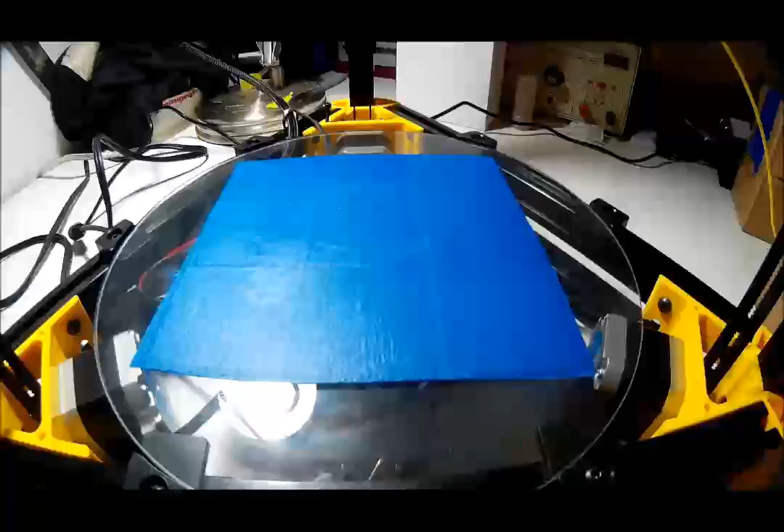Well, almost ready to start doing the end caps. These are the caps that cover this up here. I did it extra thick for wires, adjustments, anything I might need to do. Gotta do all three of them.

It says approximately 4 hours to do one. Oh, here we go. I know, that light's bright. Should do a 5-line brim. I kicked my overlap up to 25 from 15. I noticed my edges there's a little gap in them.

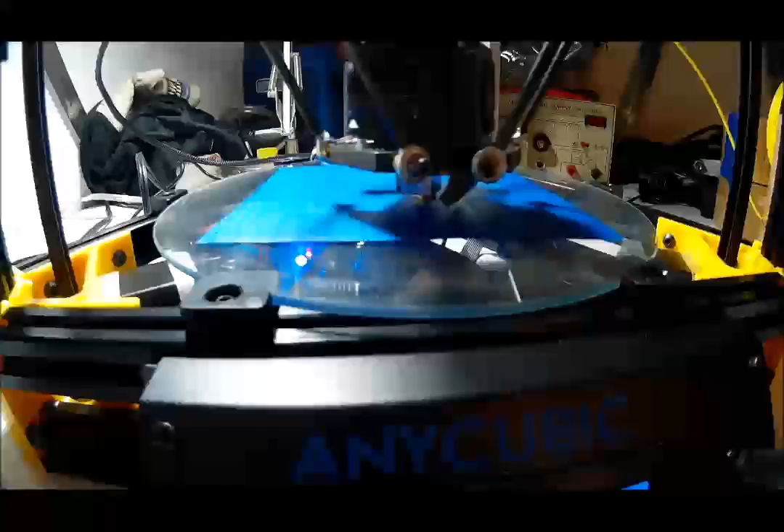So this should be the brim. There should be 5 lines. That should be plenty to start getting the filament heated up and going the way it should.

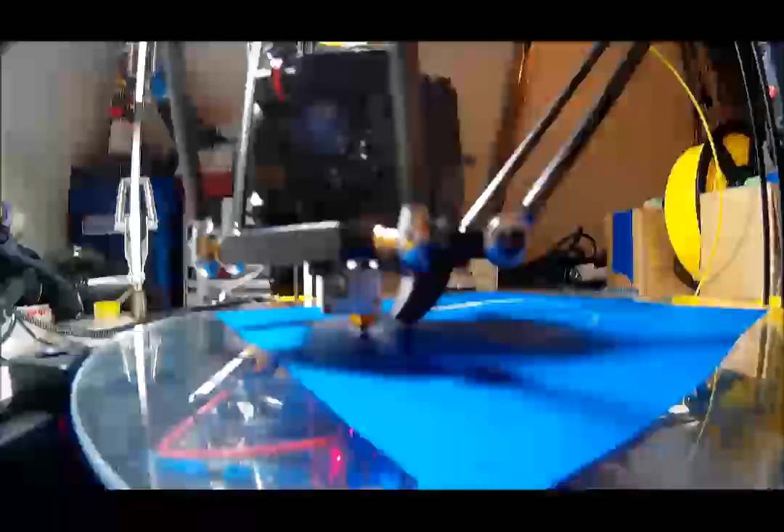So far, so good. We'll just watch that first layer go down, see if we get any lifting or if it does any better. I think I got everything tweaked now.

And then we'll come back for the last couple of percent. Now it looks like we're done with the brim, and we're starting to build itself. You can see that little gap in there, I think. Hopefully you can see it.

Now you'll notice over here where it's pushing into the tape and smeared. I raised this side of it up half a millimeter because I kept getting that lift on this side. And it may have been too much. We'll see how it goes. I may end up having to stop this.

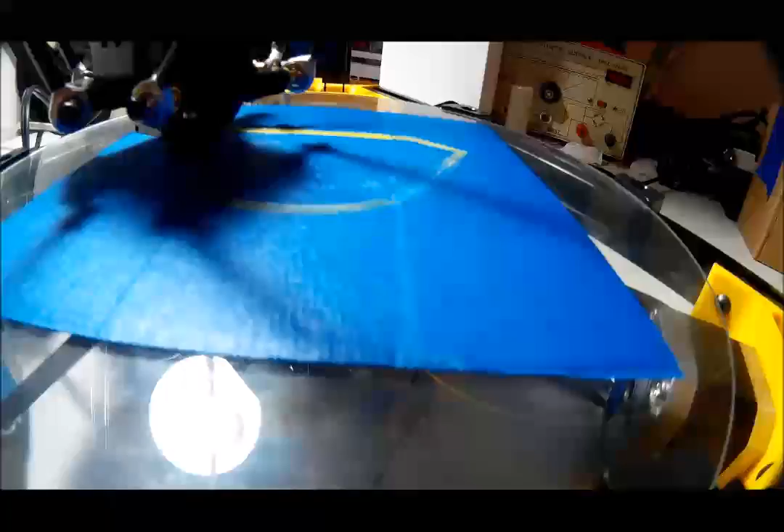That first layer might be an issue. I think I should have went 0.25 instead of 0.5.

Now this first layer I am not going to kick the speed up. It's definitely pushing into the tape. Ouch.

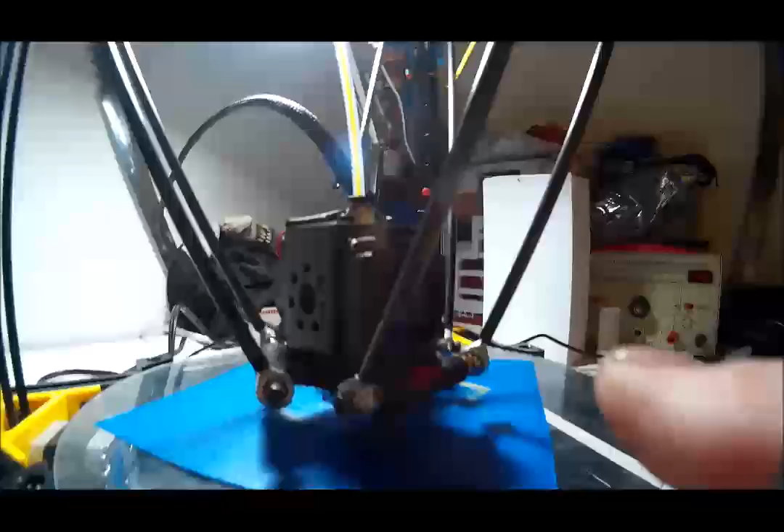And I told it not to cool the first 5 layers, so you can see my fan is not on. I told it to not cool those first 5 because I want it to stick. Been having some issues with this corner. Trying to avoid that.

I'm trying to find a good spot to put you.

Definitely having some issue there. I lifted it up too much. I guesstimated 1 layer of tape to be about 0.25, and I put 2 on there. So I should have put just the 1.

We'll let this get to at least the second layer and we'll see if it's doing anything. If not, I may have to reevaluate.

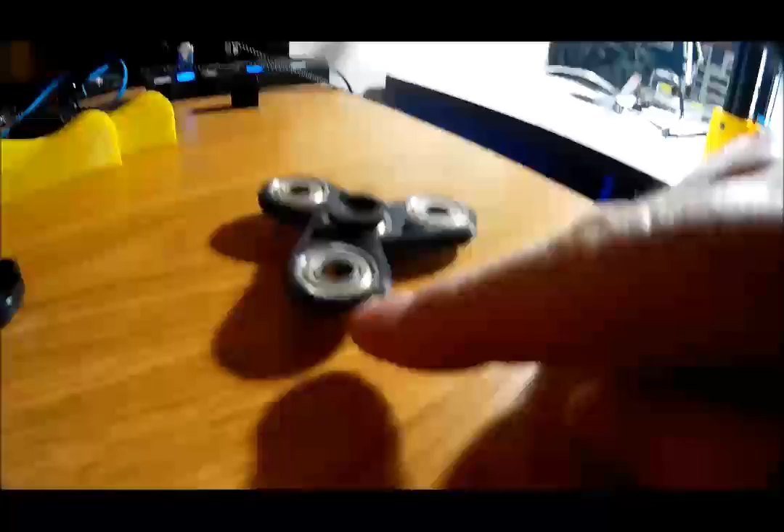This is the side that lifted on it. And then I made my, what do you want to call them, filament holder things. And this is the side where it was laying down and it lifted up. And then this one, and the same there. And the exact same there.

That's why I put that extra layer over here, because that's where it's been lifting. Hopefully we can get it to stick.

But clearly 0.5 millimeter was too much. I don't really have any way of telling it to skip to the next layer and move up a height.

Let's now finish that edge, I think. So it should start going pretty good.

Talking to a friend of mine, and he was saying that first layer should basically smush into the tape. Well, it's smushed.

When it gets up to that next layer, when it lifts up, well, I might wait for this third layer actually. When it gets up to the third layer, I might speed it up a bit.

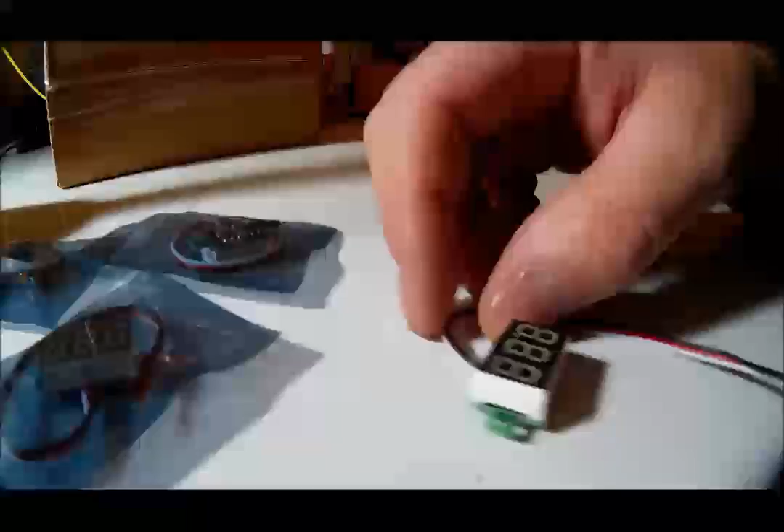I did get my LEDs in, by the way. I'll show you those real quick while we're waiting. They're actually a lot tinier than I thought they were going to be.

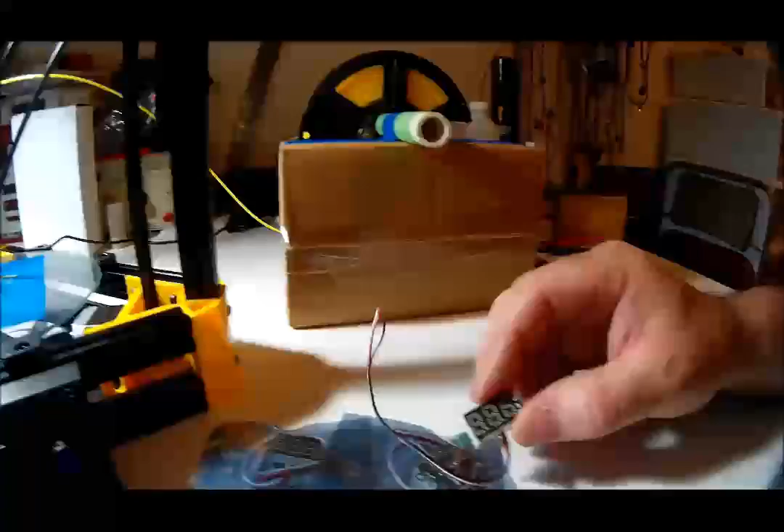But these go up to 32 volts. They're actually a lot better than I hoped. Now this one's open because I tested it. I only ran it up to 28 volts because I'm only going to be running 12 volts on this, maybe 14 on the bed heater. But I ran them up to 28, no issues of any kind. They're pretty tiny. I was thinking they were going to be a little bigger, but that's fine.

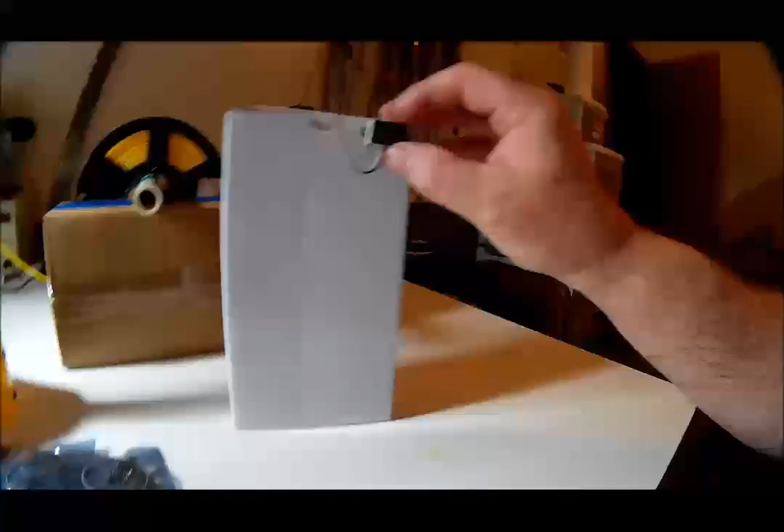Basically the power supply will be sitting on there. I'm only going to have 2. I don't see any reason to have 3. One for the voltage going to the board, one for the voltage going to the bed heater.

And I thought I ordered yellow to match my printer, but I got blue instead. Which is okay, because that actually matches my motherboard, and my display screen are all blue. That's fine.

Alright, now it's doing the second layer. It's doing the outline, the shell. You're looking the wrong way. There you go.

I did not double check the angles on these. The person who uploaded them said they were specifically for the AnyCubic Plus, and I'm going to take his word for it and print this first one. Not even going to question it.

Before I print the second and or the third one, I will definitely be checking this, making sure it's the right angle and the right fit. He did have pictures of it up on his printer, and they look pretty good.

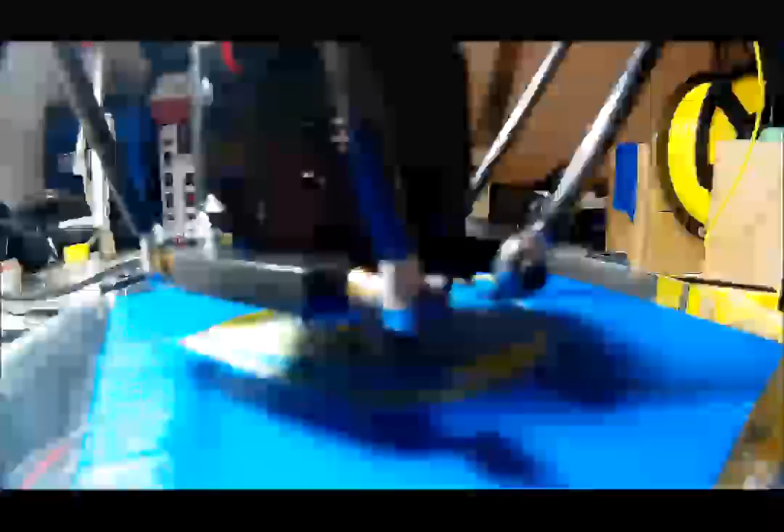I think here you can start seeing the lines going down. Of course, when I get over here, it wants to move over here. They look like they're laying down pretty good.

See, it's laying down pretty good.

After this layer, because it's going pretty slow, I mean it's fast compared to those little H printers, but I've only got it set to 30 for speed. I'm going to crank that up to about 100 on the next layer if this one doesn't have any issues and everything looks like it's sticking. So far, and this is the good side that I've never had a problem with, it's going down perfect.

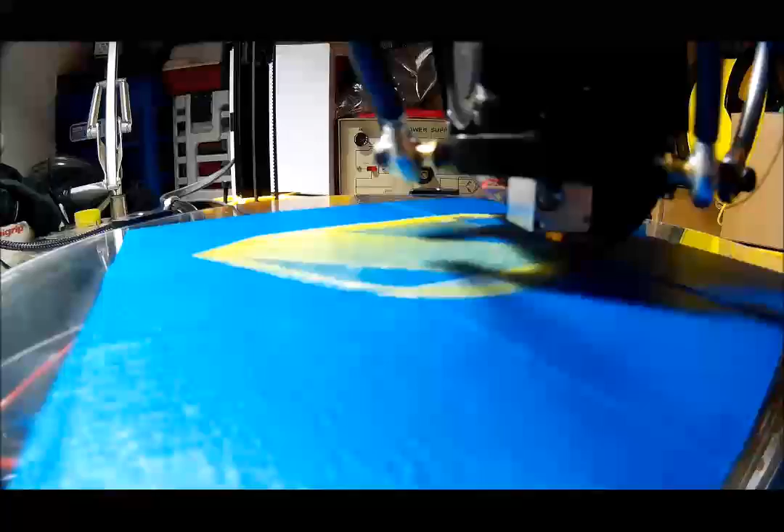I did change the infill, come to think of it. I went from 25, changed it down to 20. Still left it a little thick because these are going to be, hopefully, permanent parts that are going to be up top, and once they're on, I don't plan on ever taking them off unless something bad happens.

Alright, now it's starting to do this edge over here that I got a little higher than I anticipated. Looks like it's laying down pretty good. It's only got a little bit there so far though. Trying to see that corner. Just have to wait on it.

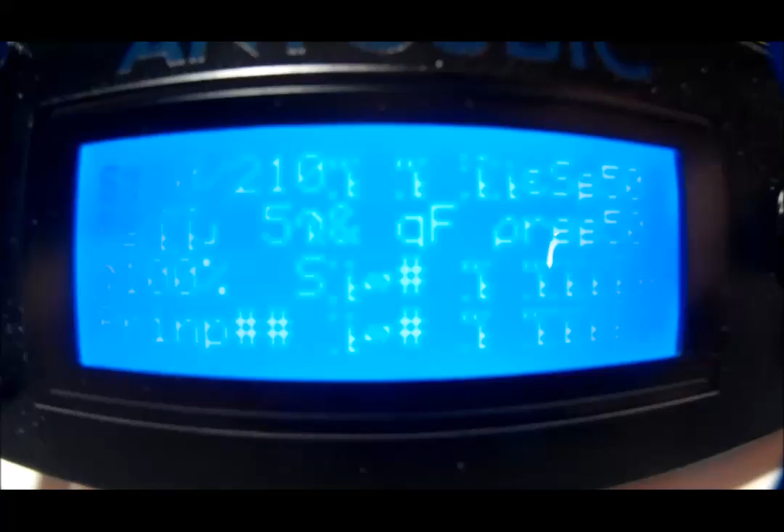Oh, there's another thing, my board went nuts. Now that used to freak me out, but then I realized that it actually completes the print, it knows what it's doing. I have no idea what this is all about. However, that does make it difficult for me to turn the speed up.

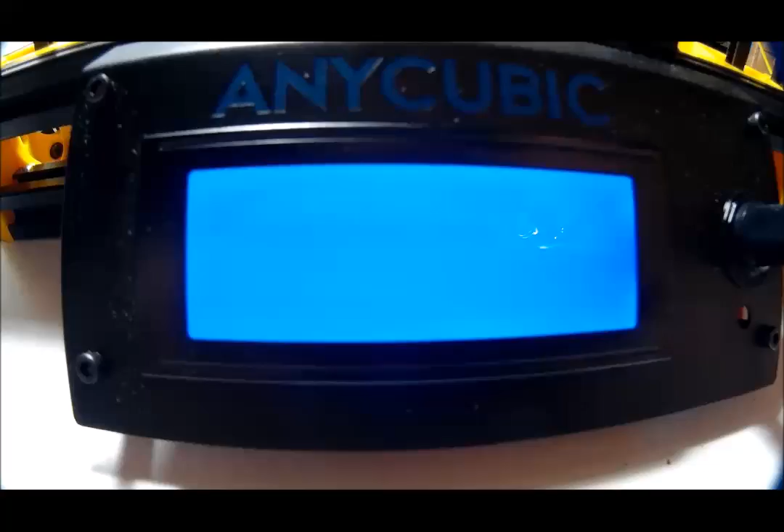Because if I can't see what I'm doing - now if I would have made note and knew what it was doing, I think it's the second click down, press - but I would just be guessing. Yeah, and then if I push it, it just goes out. Still wouldn't have made any difference. So yeah, some definite issues with the display screen.

A friend of mine's screen, he says his does the same thing. It freaks out and prints nothing or shows nothing on it, and then it starts printing garbly gook. So that means that me kicking the speed up is probably not going to happen. Well, that sucks donkey turds.

Still watching that print, and it is filling that corner in just as I hoped it would. I think just that first initial layer I had it, like I said, a little bit too thick. So from here on, now you can see it, it laid down a very nice layer, and everything seems to be sticking.

I did the overlap. I went from 15 to 25. And granted, we only have one layer down, so it's really hard to see, but I think it overlapped quite well.

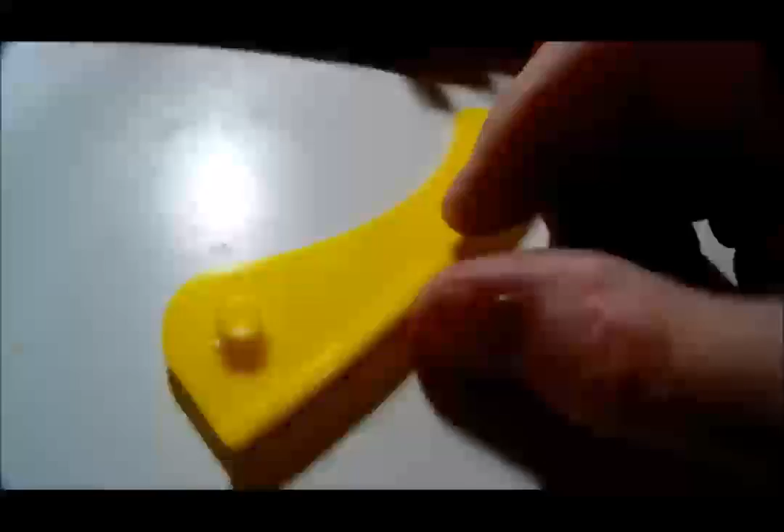I pull this apart. Hopefully you can see, like right out on that edge, you can see a line. That line is what I'm trying to get rid of. Oh, there you can see it, that little line, that's the overlap. That's why I went from 15 to 25, so hopefully there'll be no line.

Now this is where I would normally have kicked the speed up about 3 to 4 times what it is, going from 30 millimeters a second to 100 to 120. But my screen is not cooperating.

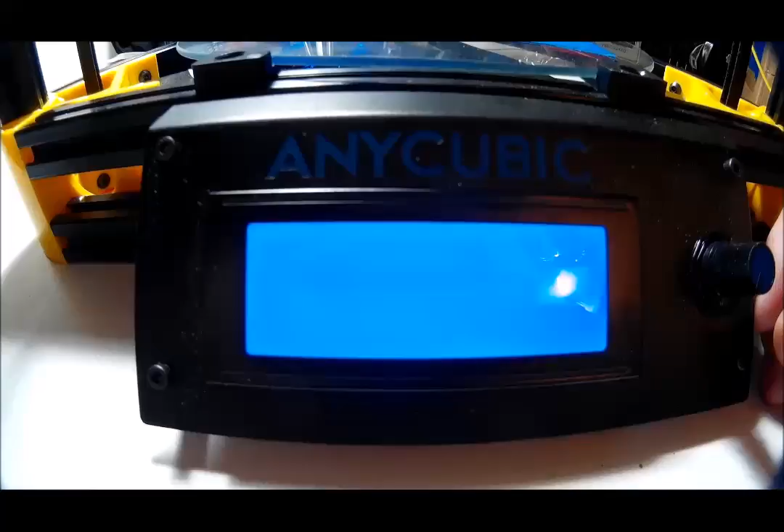Alright, well this is going to be a 4.5 hour build according to the Cura that I used. I'm not going to make you watch the whole thing, and I'm not even going to speed you through it. I'll come back every so often and give you an update. We'll do this whole build, I'll post it, going from what you've got so far all the way to the very end where I test fit, any sanding I may have to do, or any fitment. Make sure it fits, make sure the angles are proper.

But just eyeballing it, comparing it to my angles here, because they're the same angles, it looks, from what I can see, it looks perfect. And I'm happy with anything that's even close at this point.

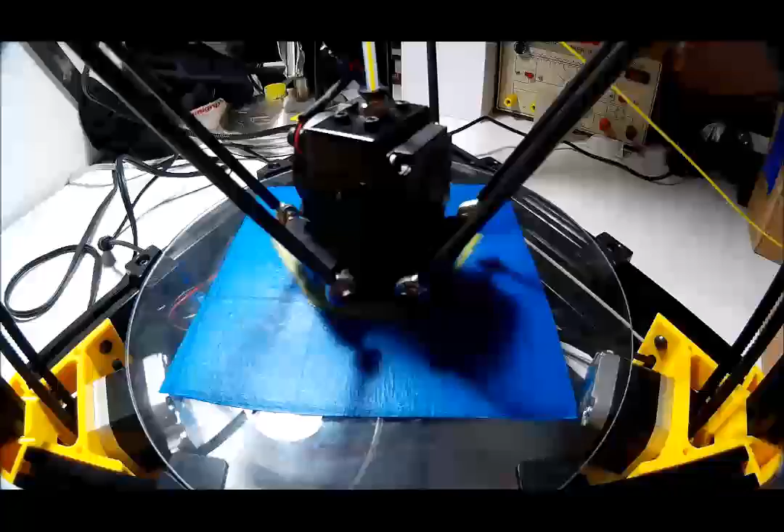Like I said, this is honestly only about my 3rd day of printing. You can see my little prints that I did here so far. So far, this is the biggest piece I have made, and this will be the next biggest. I'm only on the 3rd layer that it's doing now, and it looks like absolutely everything is sticking.

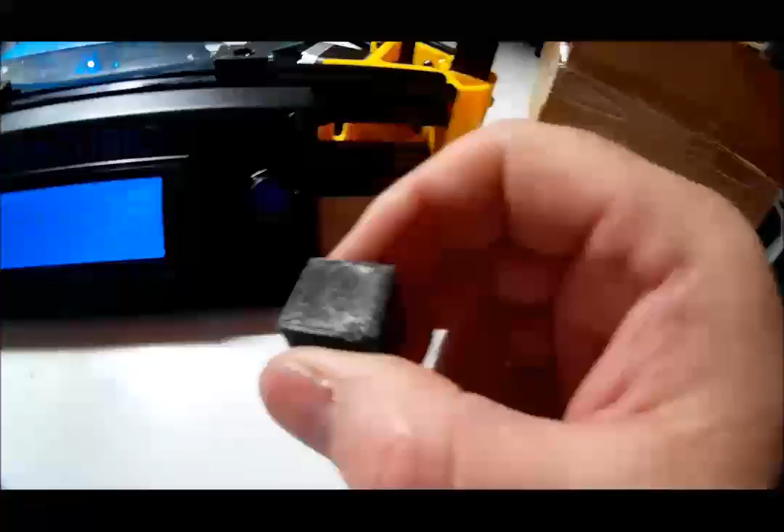My little cube I did, I think you can see on this one - there's still some glue on it, and I think you can see that line there where I did not overlap enough. That's only 15%, still got some glue on it. Haven't done any cleanup. On the top you can see that shell and the infill.

Like I said, I kicked that up another 10, so hopefully we'll see a big difference here in quality. And I think honestly on my next ones I'm going to kick the infill down even less. I dropped it down to 20, I think I'm going to drop it down to 15 - the density of it - do more of a honeycomb.

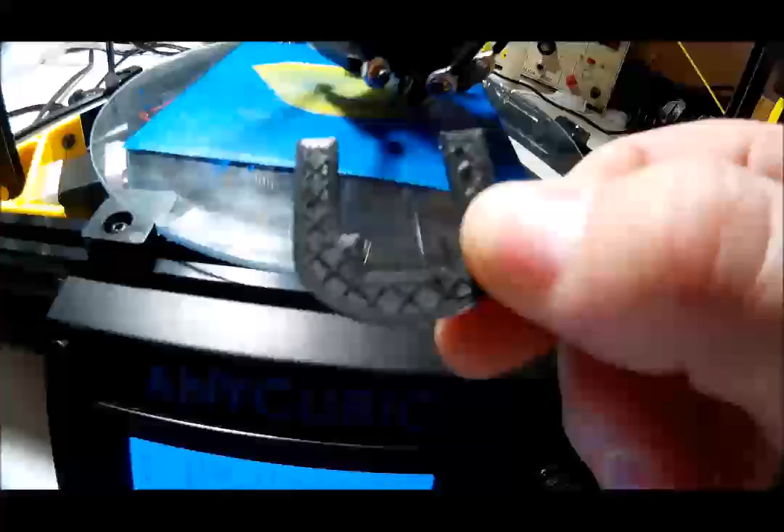Oh, I don't think I kept it. Well, you might be able to tell on this one. Yeah, you can see the honeycomb filling I was doing on this. I think on these I'm going to switch to that. This is a 15% fill, that's a 20% fill.

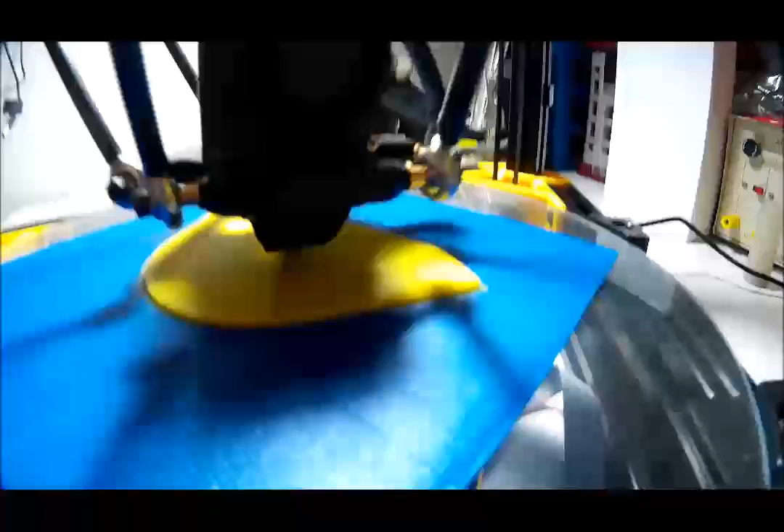Now here we are, we're about 30 minutes into it. My screen is still gobbledygook, so I have no idea the percentage or what layer or anything we're on. But as you can clearly see, it is printing perfect. My fan, as you can see, is spinning. It did kick on right when the 6th layer started.

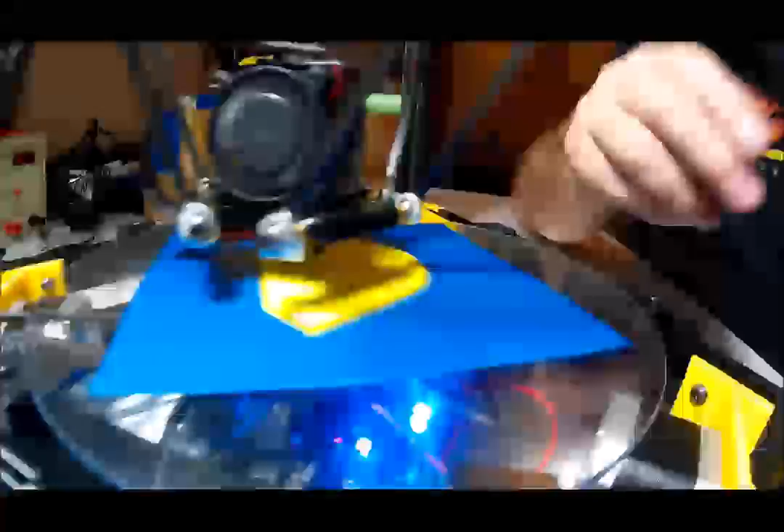Let's see if I can get you around over there. There's no lifting on this corner that I was worried about - that's the corner that always lifts on me. Everything looks nice. Go ahead and take you all the way around. Yeah, my hands are in the way.

So yeah, and the infill, way too much. I need to drop that down even more. That is going to be a solid brick. But yeah, we're going to drop that infill - we might even go down to like 10. Half of what it is would be more than enough.

I just want to let you see where we're at. Nice crisp edges, nice layering, line by line infill. You know, for the most part, I'm still going over the whole printer itself. I know that light's bright.

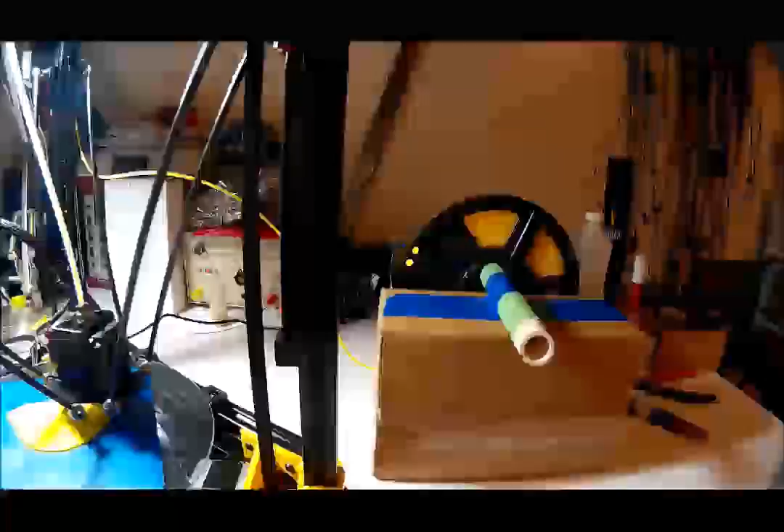My makeshift holder, since my filament reel is busted - can't use my filament reels. Darn it, thanks FedEx. Anyway, but yeah, overall, as you can see, I'm ecstatic with this printer.

Now you can see in here, I got this blue tape I put on there, it's in the shape of a square. That is because the particular build that I'm building pretty much fits it. I didn't see any reason to tape all the glass and go over everything, because this print doesn't take that much room, so no reason to waste tape.

But yeah, it's coming out pretty much everything I can see is - I don't see any issues anywhere whatsoever. Now again, I went off the person's build print that he had on Thingiverse, so I'm not 100% positive it's going to fit. I don't know why it wouldn't, but we will be finding out.

Actually, I just realized it started doing the layering for the inside where the cap's going to go, where the pulley sits up here. I just now started doing that. I think you might be able to see it better from here. Well, of course, it comes over to this edge. Really, dude? Okay, there it goes. And you can see the outline there, it's just starting to do it.

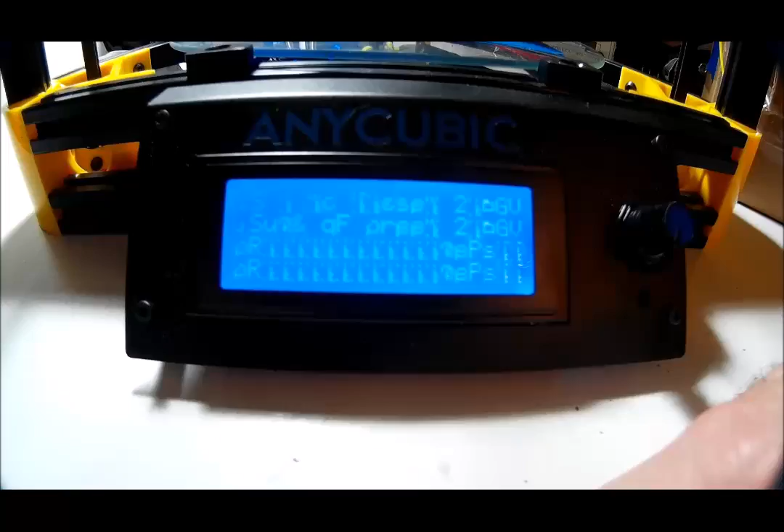I would tell you what layer I'm on or what percentage I'm on, but my screen is just not cooperating at all. I just got nothing out of it.

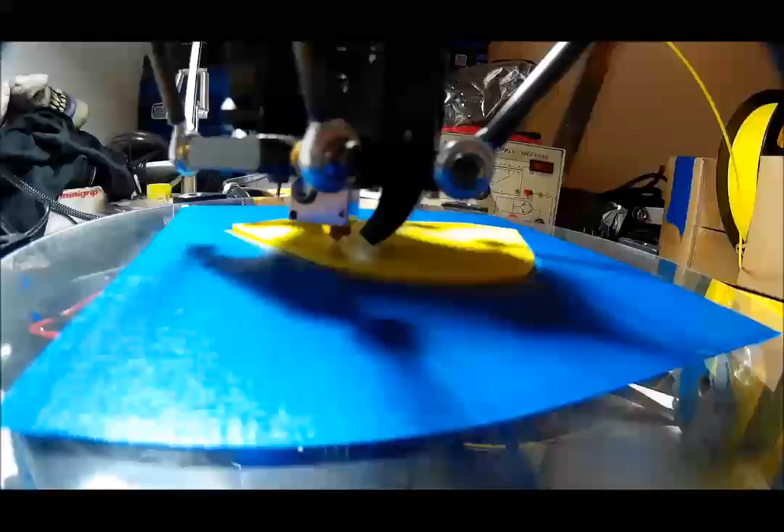And it's doing a little infill there, right there, back and forth, as you can hear and see. And for as thick as that infill is, I mean, they're like perfect layers. No overlapping, no melting, no gaps, no blobs of nothing. It's like absolutely perfect.

And for the build that I'm in, for as new as I am, for as new as this printer is, I mean, it's not even broke in yet. I am completely happy with it.

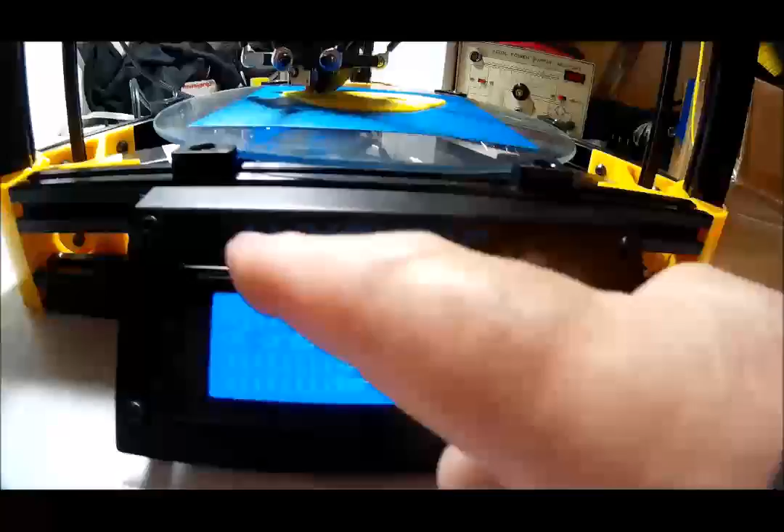You know, the screen has a bit to be desired, I think I've mentioned that now. You can see it's an AnyCubic. It's the Plus version, so it's 300mm by 240.

I think actually after I adjusted it, and I did put my linear rails as high as I could with the limit switch and not hit, I think I ended up actually at, I want to say it was 293.5-ish. So I'm about 7mm from 300.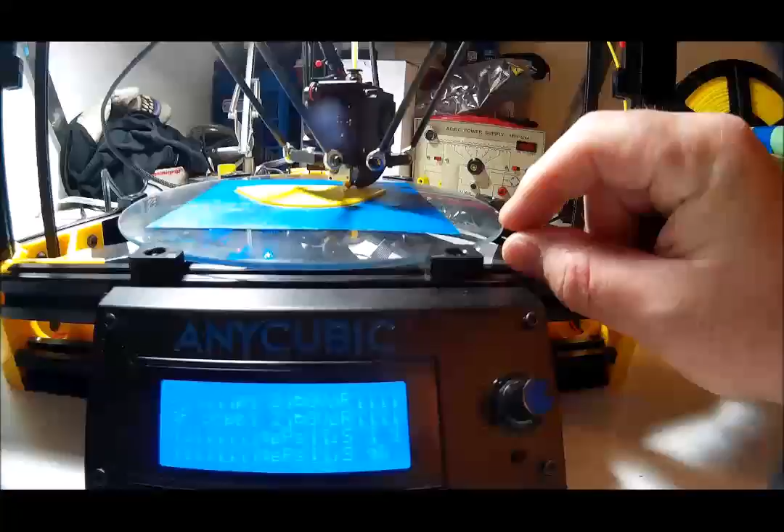Now that's with these current mounts for the plate, for the bottom base. I have not got the heat bed on there, but I am going to be switching these out. There's another type I'm going to use that's going to sit down a little. The hot bed will go down a little lower, and then this will actually be almost on the rails. It'll be real close, and then it'll have the springs on each end, 2 on all 3 corners.

And I don't know if I'll gain any space or if I'll actually lose some space. I would assume I'm going to lose a little bit, but from what I've seen in the pictures and stuff, it sits a little lower, so I might gain maybe a millimeter, maybe 2. I wouldn't say much more than that. I might even lose a millimeter or 2 with the springs on it.

We'll find out. So on the left hand side there, you can see it already did the left outline fill in. It's doing the right side. It's actually almost done with that. The middle part, I believe, is done. We'll wait for it to finish that edge over there. We got about 7 more lines, I think.

I'm still just fascinated with the math with this, that it knows precisely where it is. Back and forth, moves over just enough for the width of the filament. It just knows where it's at. Whoever wrote the math on these, yeah, they deserve their pay.

Now it's doing the outside edge. Now you can see that over there on the right hand side. And again, just no gaps, no blobs, no blurs, no smears. As far as I can tell, it looks perfect. And this is all stock, all the parts right out of the box.

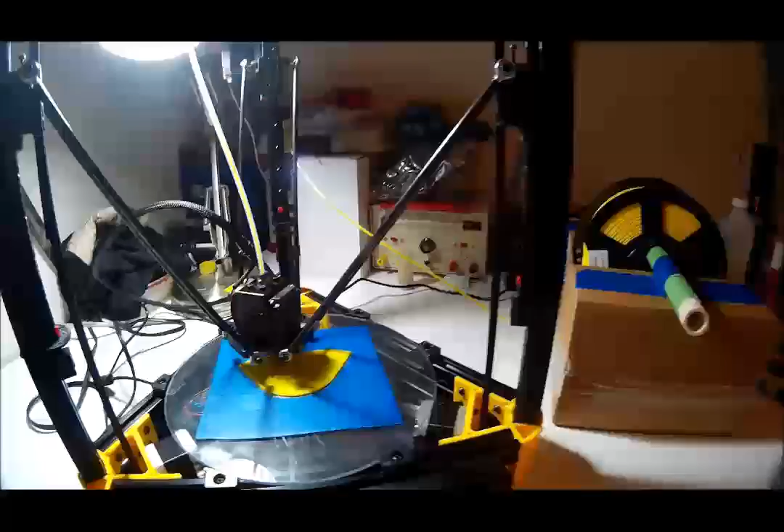I made some little adjustments, you know, I used this instead of that plastic wrap crap stuff they had. I put heat shrink on the wires and tubes up here. I haven't sealed it or shrunk it down, I left it loose, it's just to protect the wires. Not that anything gets up there, but I'd rather be safe than sorry. If you want to call it wasting the heat shrink, I'd rather do that than have to splice wires and solder them back together.

Fans are running cool. I would tell you the temp, but I can't. You know, this would have to be the one biggest negative.

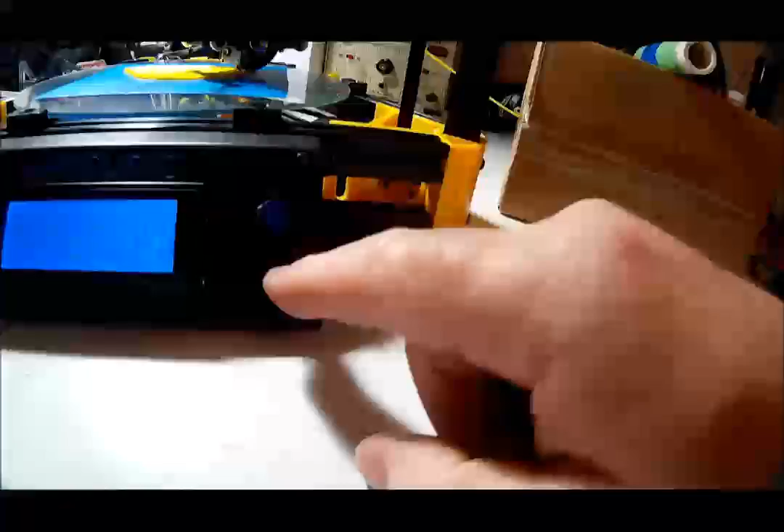The other one is this button here. I've seen some others from like GearBest, they have a little button that goes in there. This is the emergency stop. Now, yeah, you could probably stick something in there. Yeah, I could probably stick that in there and I could stop it if I had to. But I think it should have a button.

Oh yeah, glass is solid, bed's good, motors I've had 0 issues. Well, that one's ice cold, but this one actually felt warm. Yeah, that motor is warm. This one's ice cold. And all 3 are moving the same. I wonder why this one's so warm.

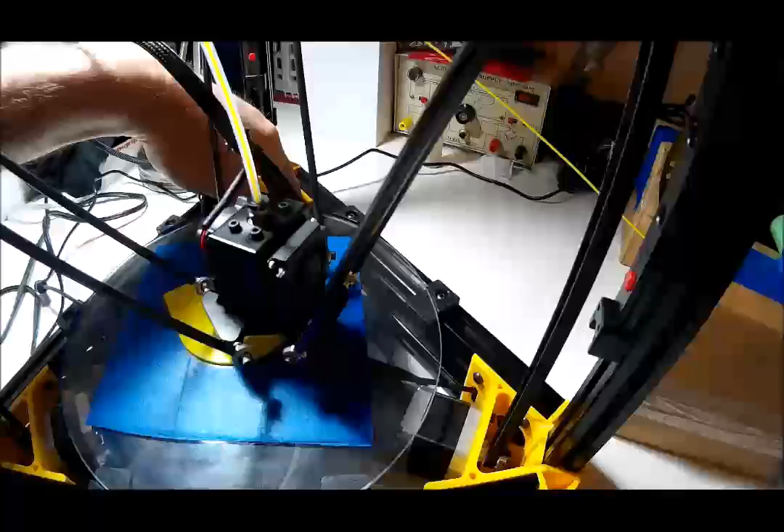Yeah, the Y motor's cold. The Z motor isn't cold, but it isn't really warm. My X motor, that's actually kind of warm. Interesting.

Well, yep, just letting you see where we're at so far. When we get closer to the top, or if I miss it because I don't know where the top is, I will come back definitely before we peel it off, show you what it looks like. We'll peel it, we'll have to pull that little brim off, or skirt. I'd call it a brim. But it is doing

Doing a damn good job. Actually, I do see one little thing, like right here in the corner.

It didn't fill in like it did over here. Oh, as I say that, it just filled in. Interesting. Yeah, okay, well it filled in now. That must have been just the end — they did that and came back over. Yeah, it's filled in now. Alright, well, never mind that.

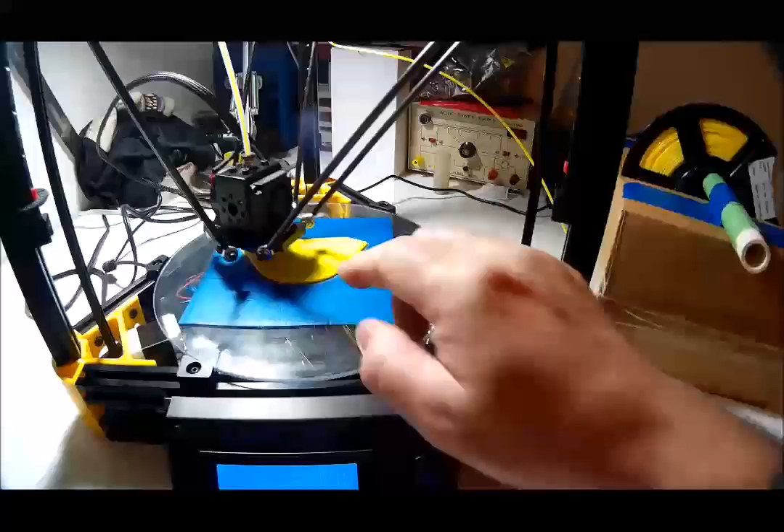I'm just going to shut up and let it do its job, and I'll be back when we get further on. I know it's going to get thicker on the edges here and make some walls, and then make the little lines that fit down in here, the little grooves that it snaps in with. When it starts doing those, we'll be back.

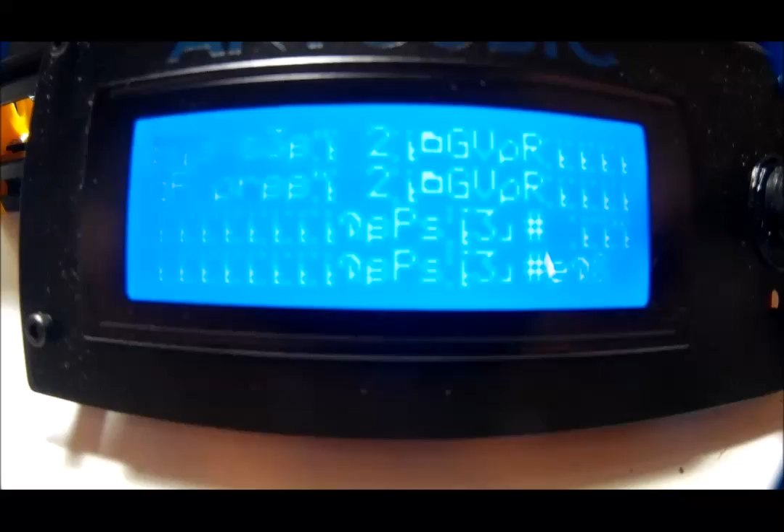Yep, 2 hours later my screen's still screwed up. And holy cow, when he said extra clearance, extra thick, I didn't realize he meant like a half inch. That is a whole lot more than I need, to be honest. As you can see, my clearance is just basically that little screw, and maybe for the belt and the wire for LEDs. I think I would have been better off with this version.

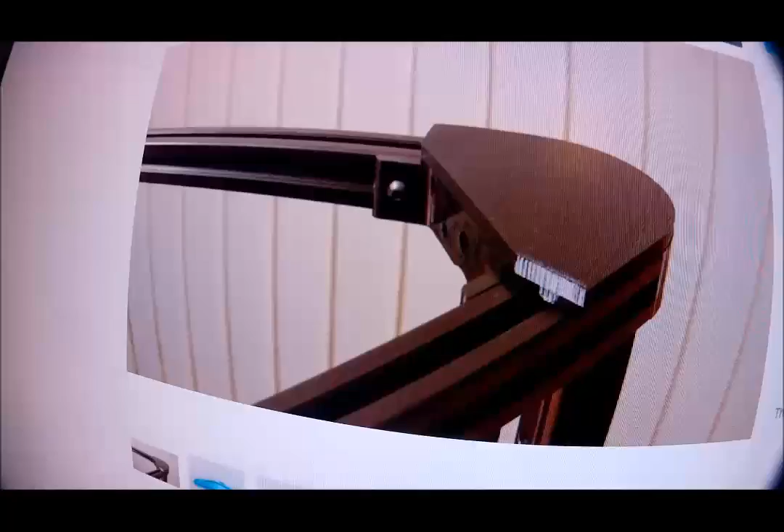I probably would have had all 3 done by now. So yeah, you can go ahead and download that one, because I think we're going to switch.

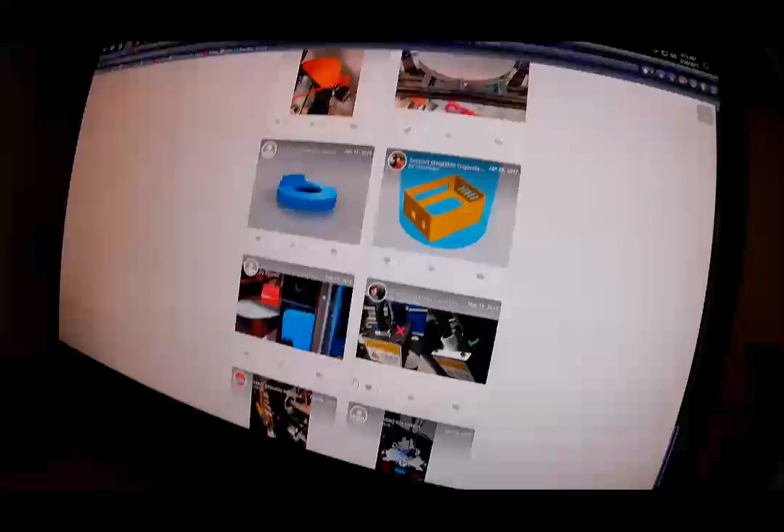The one I went to, let's see if I can find it real quick. There's the one with the filament holder — don't need that. If you haven't seen Thingiverse, excellent place to get prints and ideas in general. I mean, if you need those, they got them too.

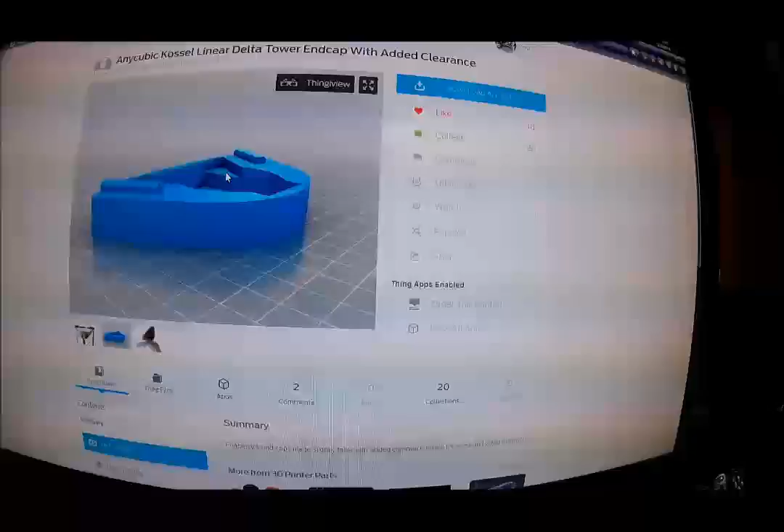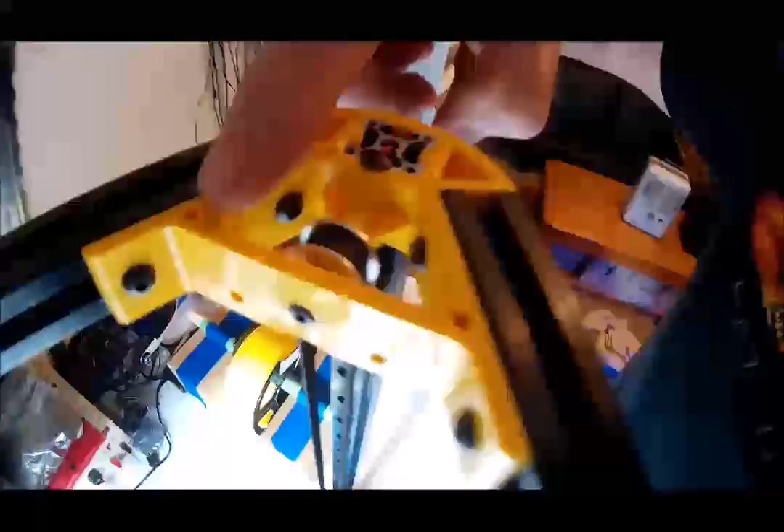So yeah, he needed a lot more clearance obviously than I did. He's running his wire through the 2 holes at the top, these holes right here. I was thinking it was like 3-4 millimeters, not a half inch, not 12 millimeters. You can see that in there — that's pretty deep.

But hey, my own fault for not measuring, I guess. But yeah, I printed out — you can see it, I liked it. I collected it, I downloaded it. I'm printing it right now.

Yeah, much more than I need. So let's go back to that one. Oh, not that far. Would... work with me. Yeah, those are the extra ones. Okay.

Let's just copy and paste that. Yeah, so there's these ones with these little screw things. Not too happy with them, but I think these here would have been the much better ones. Let's go ahead and like those, and I'm going to collect them. I already downloaded it.

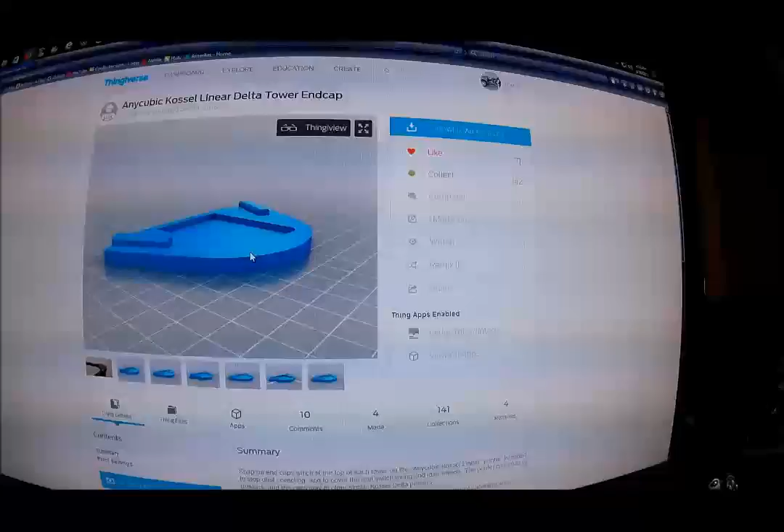But yeah, that's the one that would have been just fine for what I'm doing. I'm still going to finish this one out, and I'm going to put it up top, let you guys see it. Who knows, I might change my mind and build 2 more of them. I'm a third of the way there.

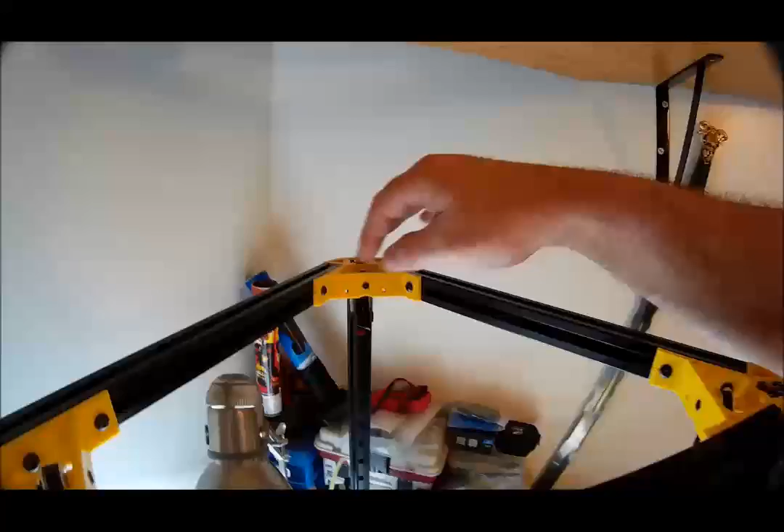But yeah, I don't think I need quite as much clearance as that's going to provide me. However, if I decide to mount something up in here, I would have the room. Maybe I can print 2 regular ones and put this big one in the back, and then run my LEDs or whatever. There's an idea.

Huh. Put the smaller ones here in the front, the X and Y, and the Z one to be the big one, and whatever wires I may or may not use. I mean, there's no reason to waste the part, I can definitely use it. But it is a hefty little beast.

I thought I cut my infill down to 15, and I might have went down to 5. Would be plenty. I mean, it's not like — well, no, I don't need anything this big. Maybe one of them. I don't know, we'll finish the printout.

It's starting to do — no, it's not. It hasn't built the little feet yet to go into the 20 by 20 extruded aluminum. It hasn't started on them.

We're close. This has been about a 3-hour build. This is absolutely the longest, biggest, most material I put into any one part. As you can see, there's no lifting, no gaps, no tears, no smudges, no issues. As far as I can tell, it's pretty much a perfect print.

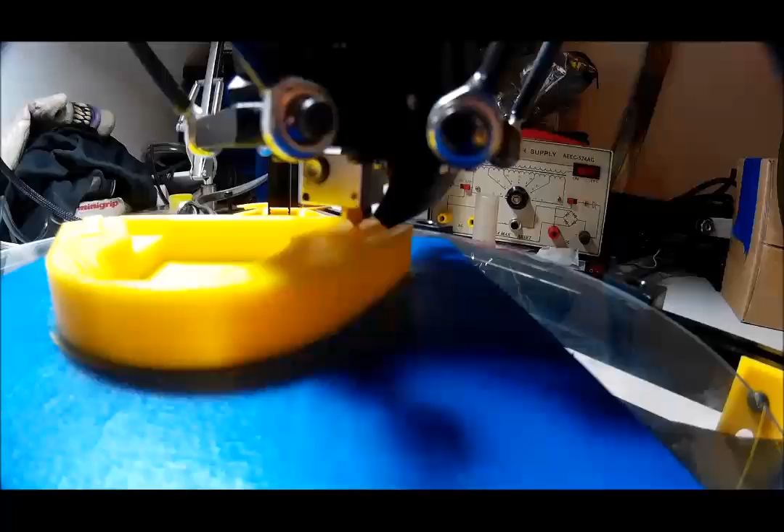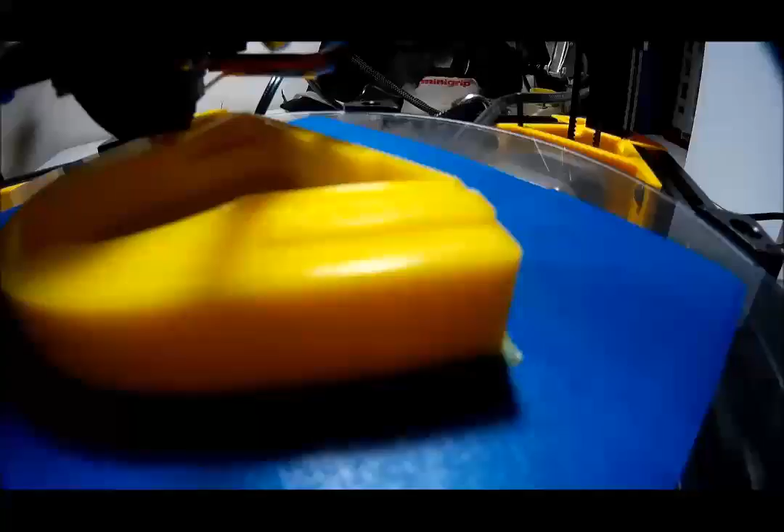It does the shell, or the outline of it, I guess. And then kind of fills it in very quickly. See that right there pretty easily, I hope. And it goes off over here. And the shell, now it's actually doing the inline, or infill.

Kind of stops and hesitates on this side though, and back over here. Oh yeah, if you're wondering, yeah, my screen's still all boogered up. I was hoping it'd come back, so no, I never sped this up at all. It ran at 30 millimeters per second, the whole thing. And yes, this took about 4 hours. Holy bananas.

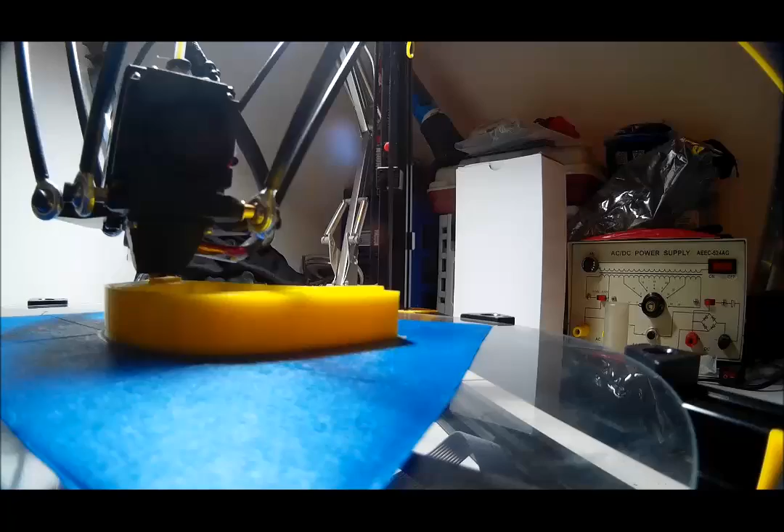Now this kind of does the back and forth infill. Now that time it kind of hesitated, it didn't stop per se. Kind of get you in close so you can see what that one looks like. Put you right on top. Hopefully no shadow.

So this one has the back and forth infill, going the opposite of the long lines. This side, try to get you in there, does the long lines all the way through. Not sure why it's doing them differently, but hey, whatever. Gets the job done.

Now, I don't know how long or how tall these are going to be. Hopefully fairly substantial though, because that's what holds it onto the top of the tower up there. And that's a pretty good chunk there that's going to be going on, so it's a big block of material. So those are going to have to be pretty substantial, I'm thinking, to hold on to everything. So this could take a while.

Just think it's fascinating on this side, it does that. Zip, zip, zip, zip, zip, back and forth, fills it in. Jumps over here to the other side, and it just does the long fill all the way through. It's got a little squeak to it. I haven't figured out what that is yet.

Oh, I guess it does a diagonal fill, not the back and forth. This one does the outline. Well, now this side's doing the long fill. I don't know how it decides and makes up all these informations and how it's going to do whatever it does. Only on this side is it squeaking.

Speaking of oil, I got this little oil filter gadget in here for my filament. Put a couple drops of olive oil in there. Kind of cleans, lubricates the Bowden tube.

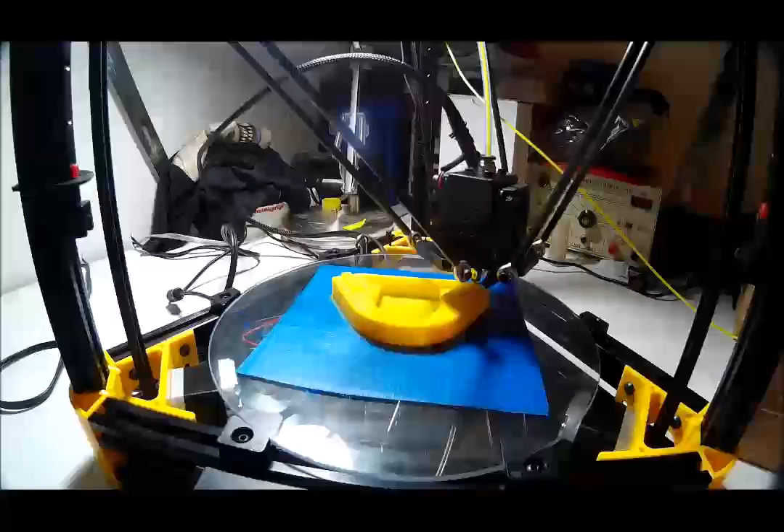Cat hair on it, yes, I have cats. Yeah, you, meow. And a muddy room, it rained today and the dogs are outside and it's really hard to get them to wipe their feet off when they come in. And I've been stuck here for 4 hours with this.

I have to turn this every so often because FedEx broke my frame case for my filament, so I can't use my nice little filament holders. I still have to go sand them, they're not bad, but I'm still going to sand them, make them look pretty.

Well, thought I'd let you see where we're at. I know you already skipped through this part. We'll come back when it's done and cooling, see if we can't get it to pop off there. I guess it doesn't matter if it takes the tape off or not, because I'm going to have to change the tape since I made it too thick.

Now it looks like it kind of rounded on that one, looking at it. Everywhere else, these are sharp corners. I mean, they're sharp, you can put an eye out with that. This is still warm, but it looks kind of rounded. The other side is nice and square. Now it just finished, so I'm not going to touch it.

Interesting. Alright, we'll be back when it's completely done, and that head's gone up, and it's cooling. Gotta find out what that squeak is.

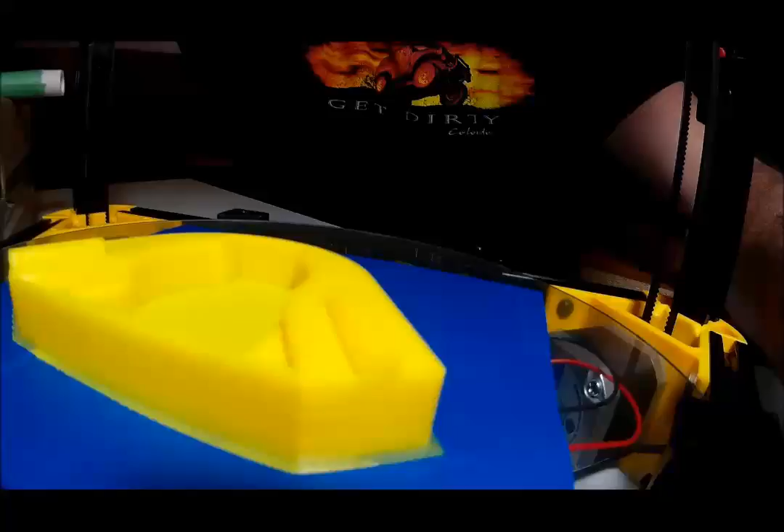Alrighty then, so no lifting of any kind that I can see. Now you can see that back side that I can't, because I can't get to that side. And that is a healthy, thick chunk. It is not wanting to come off.

Nope. Now they did not send me a little putty knife or anything of any such. Let's see if I can get into this raft, or brim, or whatever you want to call this.

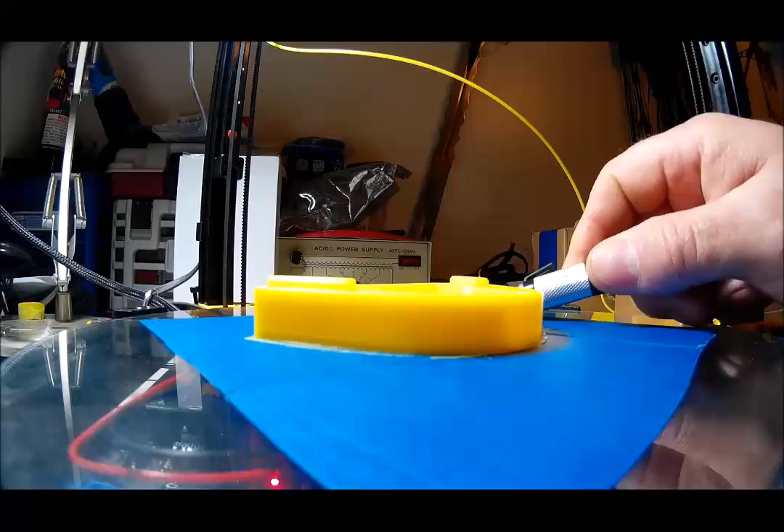And it's definitely stuck down. Trying not to cut into the tape. Yeah, I'm screwing that tape all up. Darn it. Yep, it does not want to lift off.

So we get the knife. Oh, here's some lifting. Pretty sure we're lifting the tape up with it, which I was hoping not to do. Oh, now I'm turning the glass. Yeah, we're screwing that tape up.

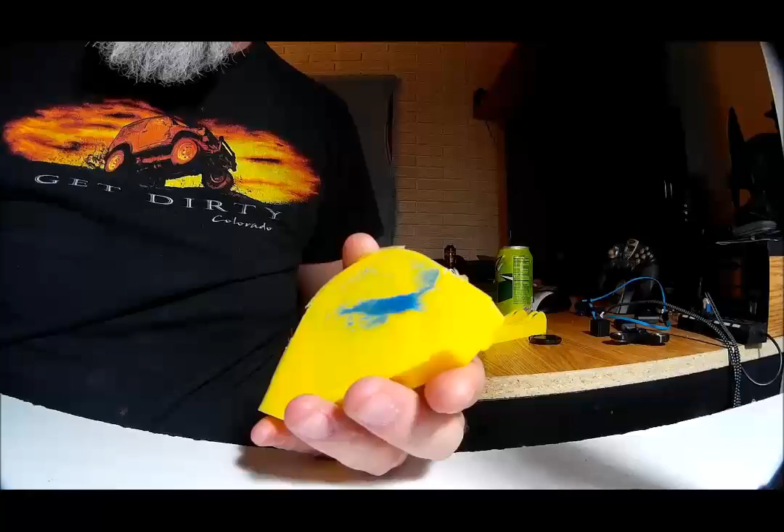Alright, we're just going to take the tape off with it. This is the mess we ended up with. That tape stuck. Good job. That is obviously not where the tape is, but that is pretty damn smooth.

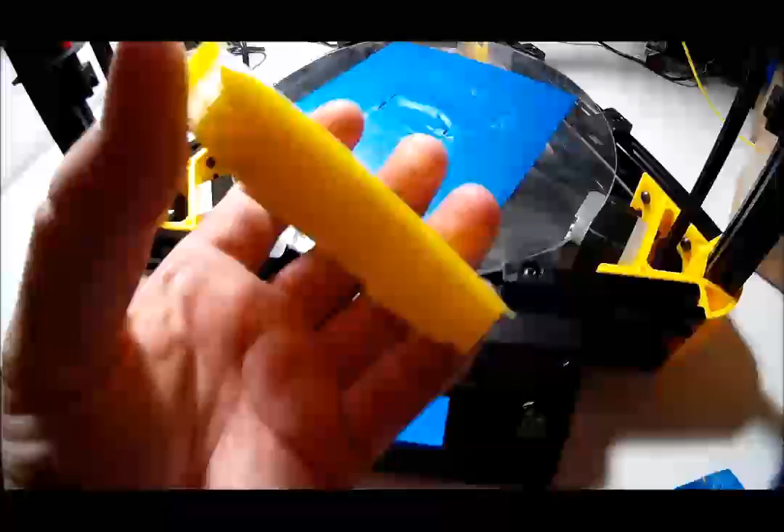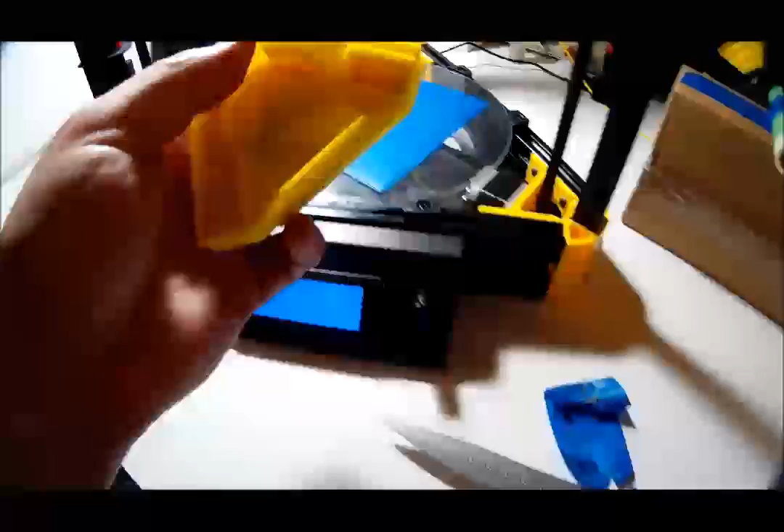I mean, obviously I have that thin layer of glue on there I have to peel, plus the brim. And that thing is shiny smooth, the edges. I mean, there's not a flaw in it. Other than the fact that it's like 3 times bigger than I thought it was going to be.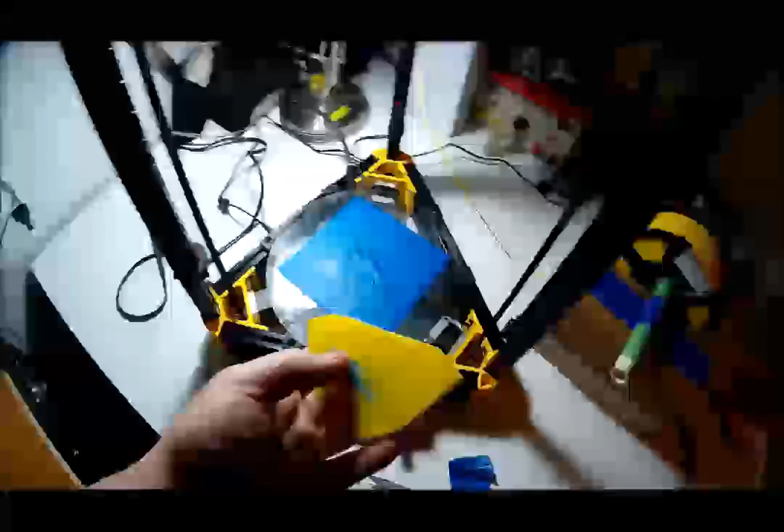All in all, pretty good. Didn't ask you. And then, I showed you earlier, I'm going to put this in the back. I think I am going to use it there. And I'm going to print the two smaller ones for the front.

Yes, I still need to trim my belt, I have not done that yet. Good grief, what is this world coming to? We're cooled down already, go ahead and power that off.

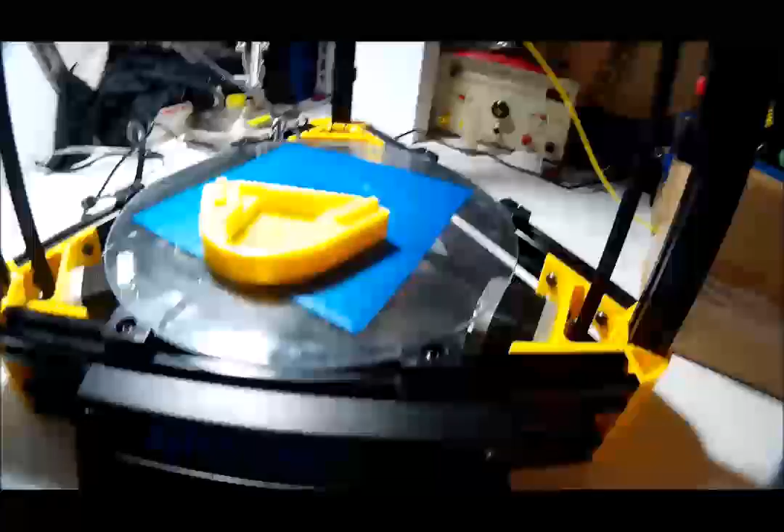All in all, another successful build. I think even with the little mishap with the tape, I made this side a little too thick. Now I have to check my bed level because I moved the glass.

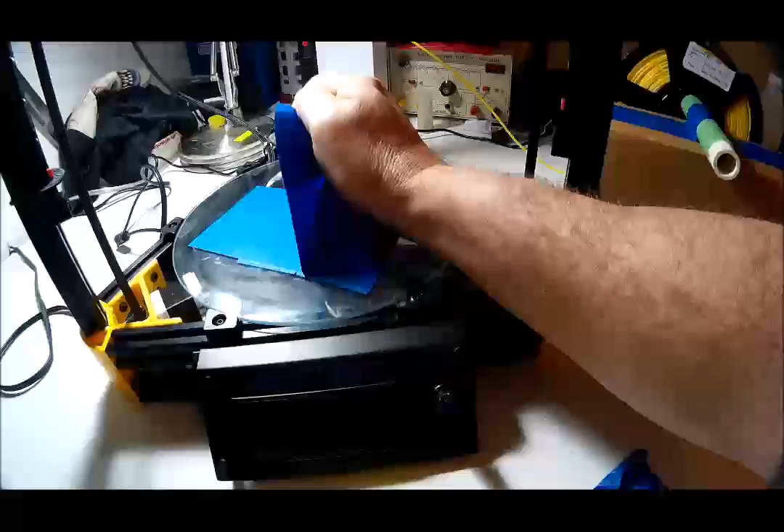Pull all this tape off. I did not mean to have to pull that off. I seriously meant to do all my builds for the end caps up top and on the bottom using that one layer of tape.

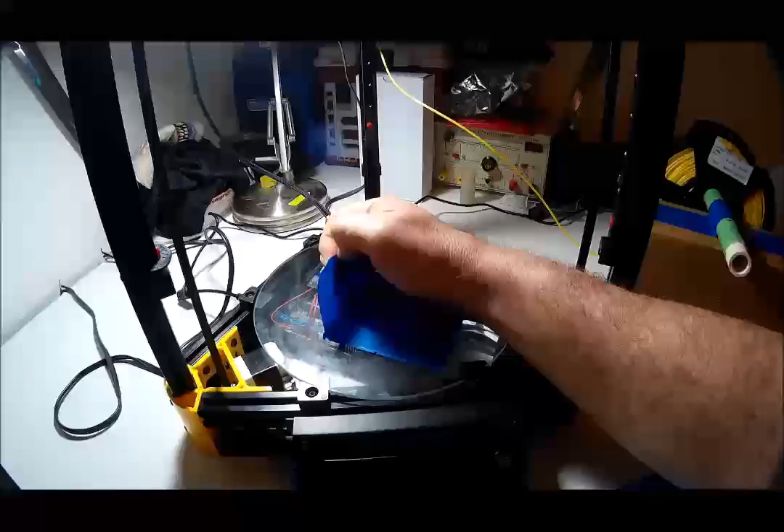Now I gotta clean up the glass, retape, reglue, print those other two, print the three that go down here around the belts. Actually, now that I'm thinking about it, I think instead I am going to build the tray for the control board, the tunnel for the fan, mount a fan.

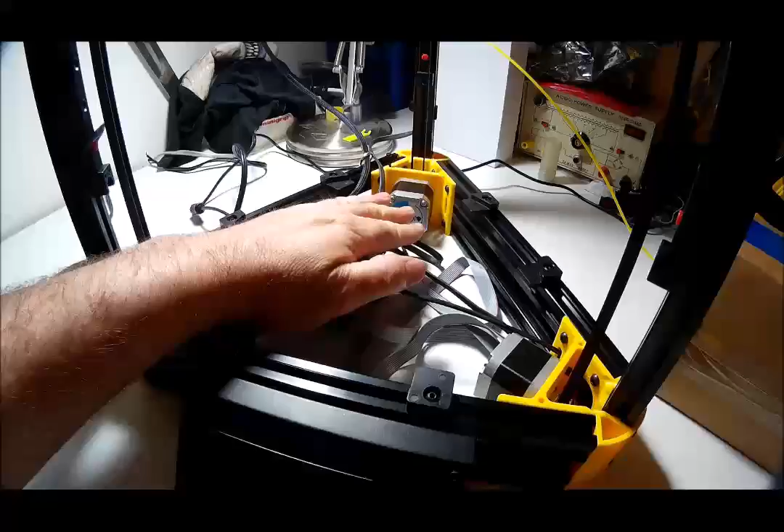I don't have one not in use, but it'll be a fan like that, a little 40 mil fan. Because I did notice some heat. Actually, this does come off, I want to feel those. Actually, they're not even warm. I guess they've had about 10-15 minutes to cool. Yeah, they're all cold, huh.

Alright, well, I'll have to reset all this.

I'll realign my bed again to calibrate it. When I do the motherboard frame that goes under there, these wires are going underneath. They were only there for starting out.

But hey, this is probably the last time I really go over the printer itself. From here out, I'll probably just be talking about the prints. But AnyCubic, it's inexpensive - not cheap, because they got a little price tag on them. Most 3D printers do. But for what I paid, for what it can do, for what it does, and how well it does it...

Now, I had a little issue with the firmware and getting connection, and I was printing 50 millimeters in the air here. Once I got past that, and I think that took me like an afternoon, amazing printer. It does the business.

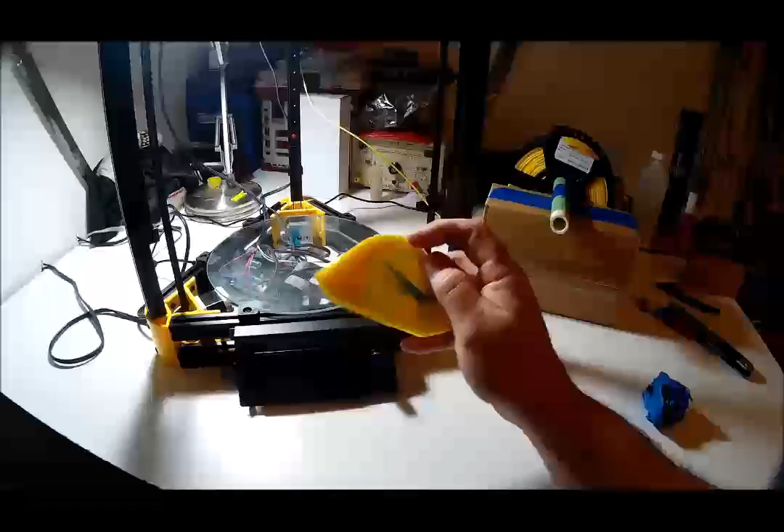Plus you can make your own parts after you peel the tape off. Everything's solid. Better be - it took 12 meters of filament, approximate, I think it was like 11.9 or something like that. But yeah, I think the cooling fan, the board, the cooling tunnel - that way I know the board's safe.

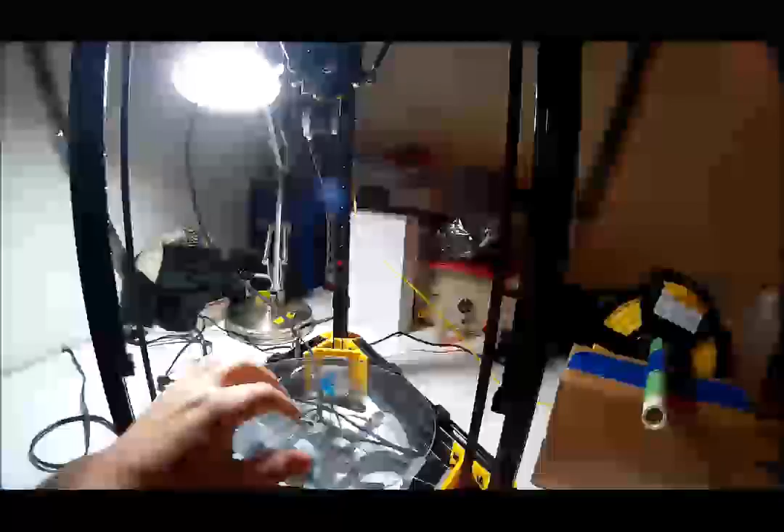Like I said, I felt some heat over there. It could have been coming off this exhaust fan up here too. Come to think of it, could have been blowing out. May have been that, because it was on that side, but still, just to make me feel better, I'm going to do that next.

And then the power supply, which is in its white box, I have to do that after. I'll go ahead and hook it up because I can perfectly use it now. It just won't have the LEDs and the nice little on-off switch and look pretty. And then I'll have some mounts of some sort over here that I'll mount on it.

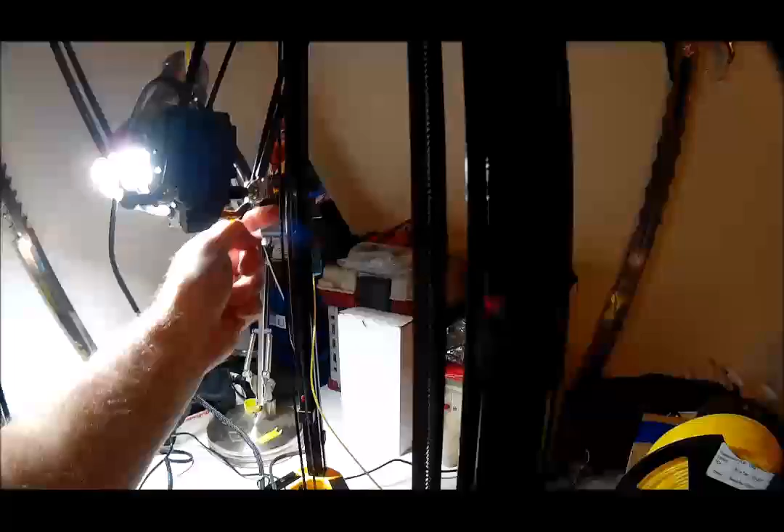And then of course this little part - I don't know, I might come up with a whole new part that I print. Maybe I'll print the whole thing and somehow attach it over here to that tower. Kind of on the order of something like this, just to hold that wire out of the way, not into the belt like it just was, but back here somewhere. Work in progress. But yeah, all in all, I'm 110% satisfied with this.

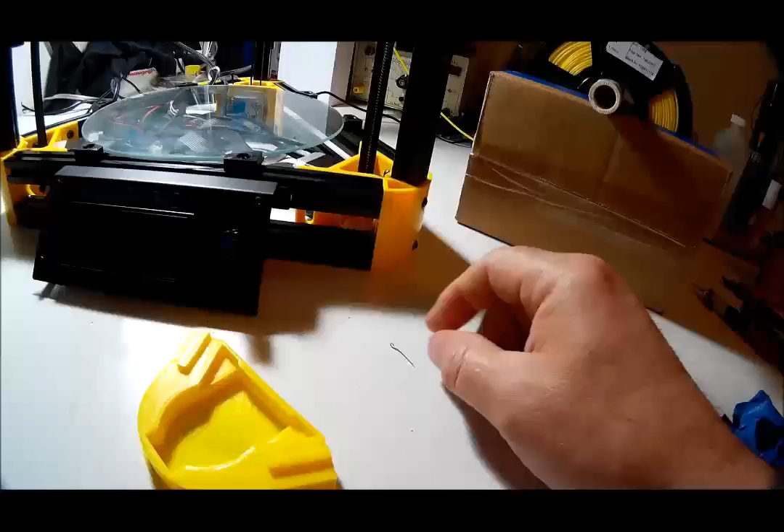Apparently my cat needs attention. What's wrong with you? What's this? That I can't quite reach. Oh, that was from earlier prints when it was dancing around and I was using that black stuff.

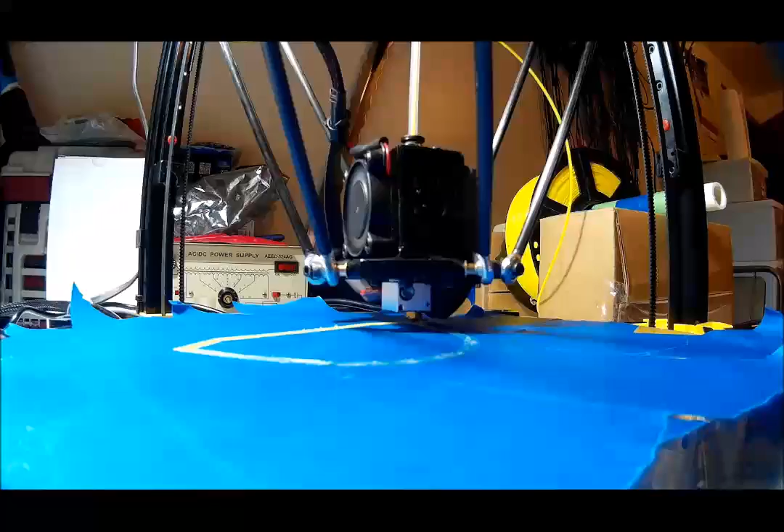What that also does is give us plenty of room so that if I wanted or needed to, I could just sand it off real quick and easy with some 80 grit sandpaper. I started off using 320 because I thought I wanted it smooth, but 320 just clogs up so fast it doesn't do anything. So I dropped down and down, got down to 80 grit - can actually get somewhere with it. And it's still pretty damn smooth. So I'm happy with that.

So as you should be able to see, the outline and the brim there. But like I said, I have it set for brim and it's actually doing a raft. The whole first layer peels off.

Now this one was said it was about 2 hours and 12 minutes. It's 9:54 now, so I would say by 12:15 should be done. I have found it prints a little bit faster than what Cura says for whatever reason. Which is fine - faster is always fine as long as it does its job.